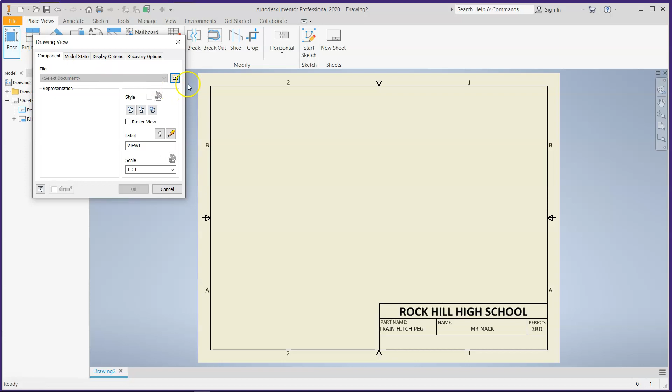We go to base, open the file, select train hitch peg. That's the one we want. Click open. It's a little big, so I'm going to reduce the scale. Right now it's set at 4:1. Let's do 3:1 and see how that works.

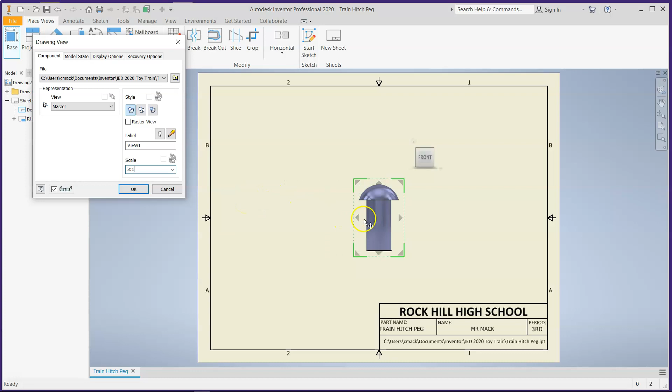That's probably good. So this is the front view, and then we'll have a top view and an isometric view. Now, the front view and the side view would look exactly the same, so I'm not going to do anything with that. I'm going to leave that just like it is. We don't need a side view.

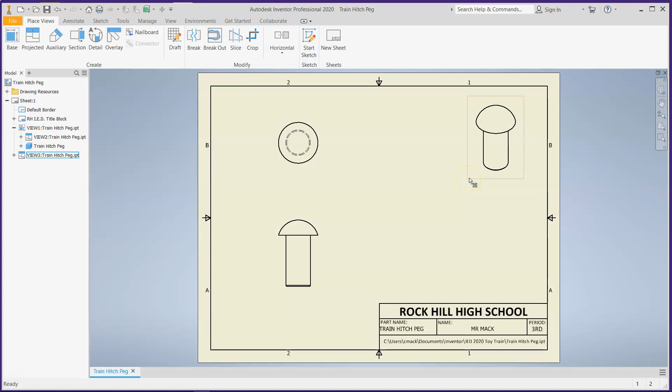Click OK. I'm going to go ahead and hover over the isometric view, get the red dotted box, right click, edit view, and then add the shade. Third button here. Click OK. Slide that down just a little bit. There we go. Okay. So we have a little more information that we're going to need on this diagram.

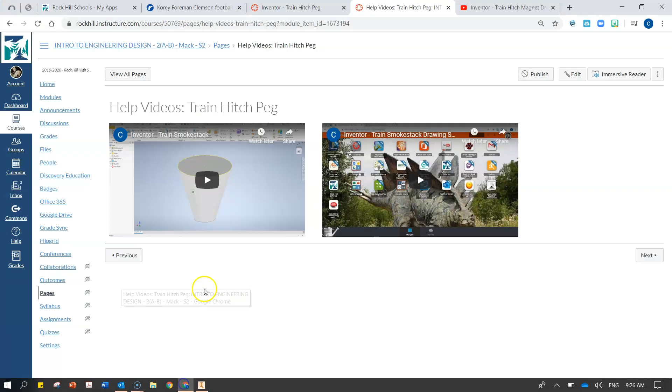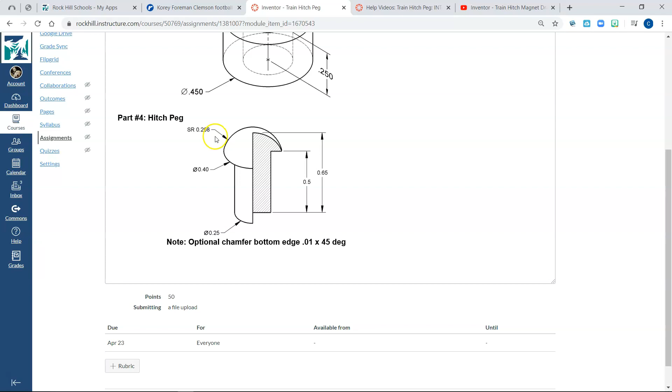So if we look back to our original here, we need the height of the cylinder and the overall height. We need both of those. We're going to need the diameters of the cap and the base, and we're also going to need the chamfer information as well as the surface radius arc. So to fully dimension this, well, the first thing we're going to need to do is know what the diameter is. So we're going to annotate.

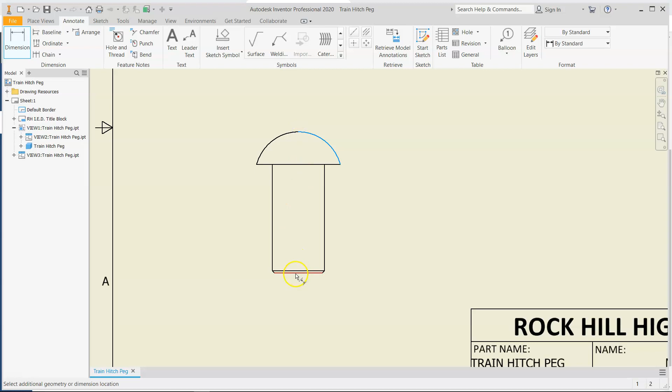Well, let's go ahead and do height. So from the very top to the very bottom, make sure you get the bottom line, 0.65. And then from the very bottom to underneath the cap. That looks good.

Then we have the surface radius. Hit escape. If you get the green dot, try not to select the green dot right there. We don't want to select that. It's going to come down just a little bit where there is no dimension. Now, you'll notice it's rounded up. I'm going to be more specific.

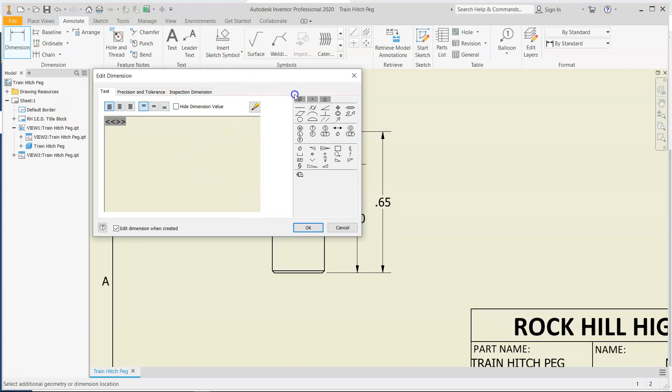So I'm going to go into here and we're going to go to precision and tolerance. And right now it's set for 2 decimal places. So I'm going to change it to 3 decimal places in both of these. And click OK. There is the 0.208. It was rounding up to 0.21. But because we had 0.208 on our instructions being very specific, I thought it best to show the 3rd decimal place.

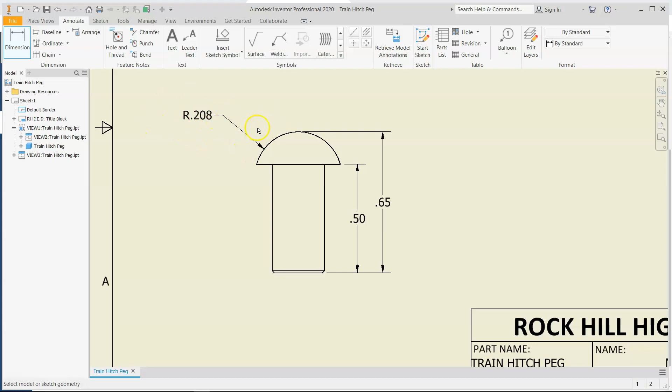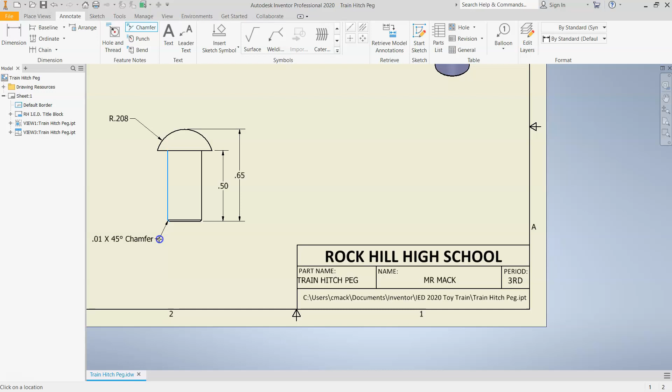Now we're going to apply the chamfer. So we go to annotate, chamfer, and we want to select the angle that is the chamfer, and then the vertical line. That's what we want. 0.01, 45 degrees.

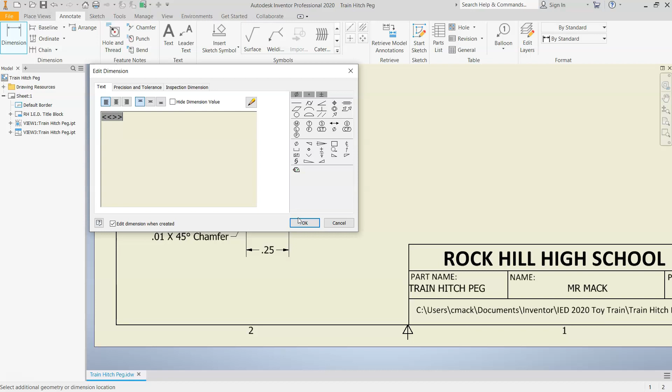And the final bit of it, the last 2 things, we don't have a view that shows us the bottom, so we're going to just have to pull the dimension diameter here. It's not perfect, but I didn't put a bottom view, and I don't think we need to go back and do that. Normally, we would have a bottom view to show the circle, but I'm not going to find that necessary. We do see that's hidden.

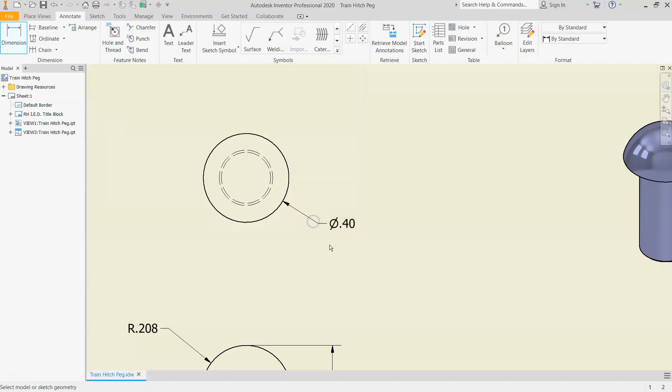And then we want to dimension, avoid the green dot, dimension the diameter of the cap. And so those are all the dimensions that you're going to need to create this part.

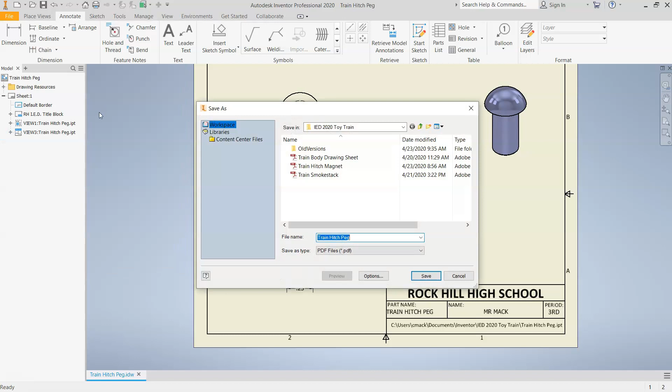Save. File, save as. Train hitch peg. Save. And then file, export, PDF, and then save. And the PDF is uploaded to Canvas.